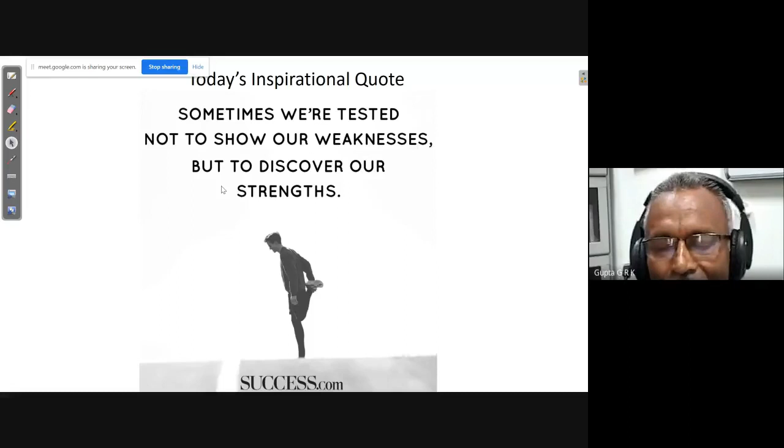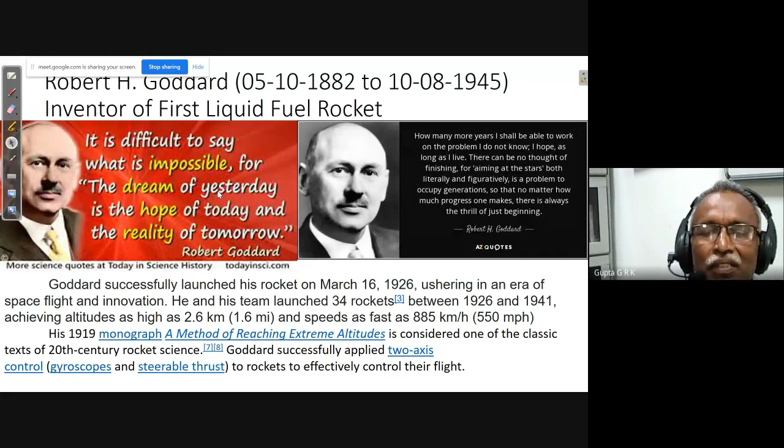There are great people born today, date 5th October. In 1882, the inventor of the first liquid fuel rocket, Robert H. Goddard, was born on that day. He successfully launched his rocket on March 16, 1926, ushering in an era of spaceflight and innovation. He and his team launched 34 rockets between 1926 and 1941, achieving altitudes as high as 2.6 kilometers and speeds as fast as 885 kilometers per hour. Such is the achievement of this fellow. His 1919 monograph, A Method of Reaching Extreme Altitudes, is considered one of the classic texts of 20th century rocket science.

Some more Nobel laureates are there. One Nobel laureate in economics, Reinhard Selten, got it sharing with Nash, John Nash. If you know, anybody heard about this name, John Nash?

Who is that? There is a biopic of him. Anybody knows that? Yeah, very good. There is a biopic, A Beautiful Mind. Yeah, nice. Akshay, good.

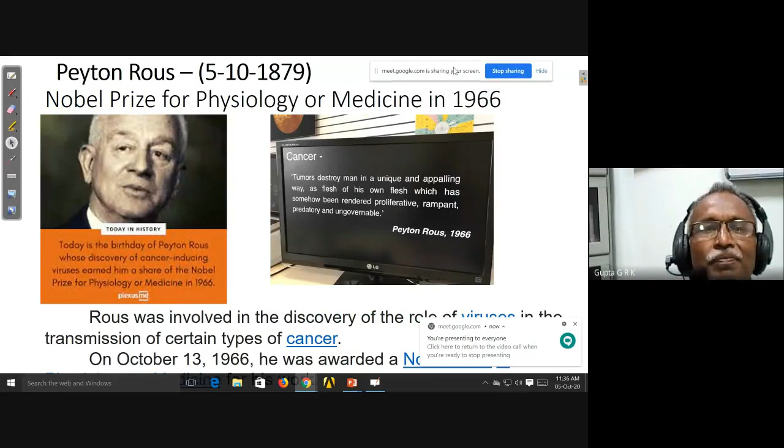So with John Nash, this fellow has taken the Nobel Prize, and he is also well known for his work on bounded rationality. We don't know much about this economics and other things. There is another Nobel laureate in physiology or medicine, and he is Peyton Rous. He was involved in discovery of the role of viruses in transmission of certain types of cancer, and he was awarded a Nobel Prize.

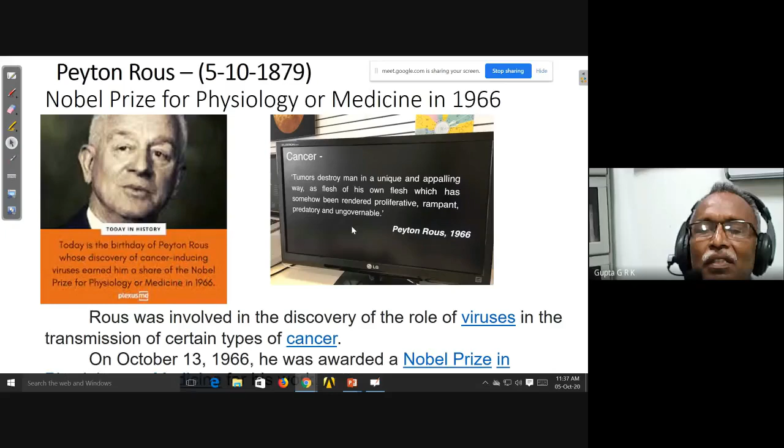So we'll start the 20th class. In the last class, we have discussed about reciprocating compressor without clearance volume and with clearance volume. We defined volumetric efficiency and also what are the factors that affect the volumetric efficiency, like clearance ratio and delivery pressure. And we have seen what is the need for multi-staging.

Then we have discussed about broad classification of thermal machines. I will reiterate what I have done because I have done it over so many pages, but I tried to put everything in a single page. Maybe the letters may be small, but everything is contained in it.

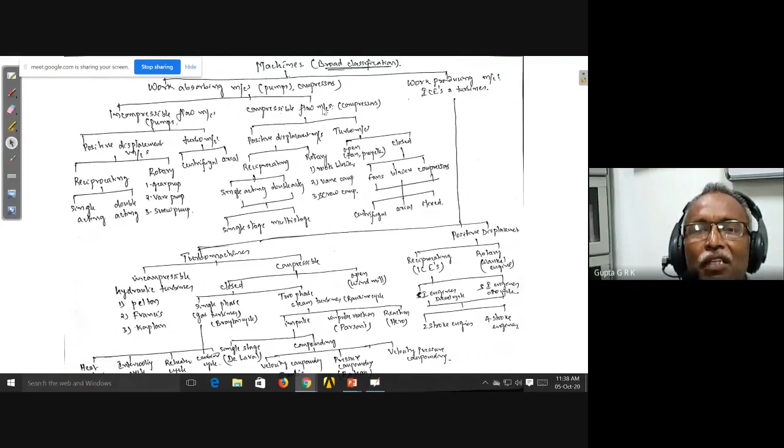This is the broad classification of machines. We have work absorbing machines, which involve pumps and compressors, and work producing machines, which involve IC engines and turbines. In work absorbing machines, we have incompressible flow machines and compressible flow machines, which involve pumps and compressors respectively. In both the incompressible flow machine and compressible flow machine, it is classified into positive displacement machines and turbo machines.

In positive displacement, we have reciprocating pumps and rotary pumps. I told you these are different from turbo machines, though these are also rotary. Rotary pumps include gear pump, vane pump, screw pump like this. Reciprocating pumps have single acting and double acting pumps, based on how many sides we are having the delivery. Before going further, we will see each difference.

Incompressible flow machine and compressible flow machine, it is based on the type of flow, but not the type of fluid. Here's an important thing: anybody know what are the incompressible fluids? Any incompressible fluid?

Actually, there is no incompressible fluid. It is an ideal fluid. Inviscid fluid and incompressible fluid are ideal fluids. But the flow can be incompressible based on the variation of density.

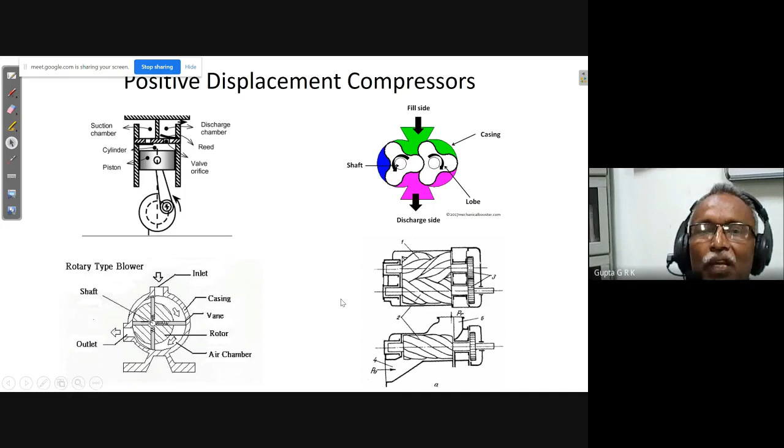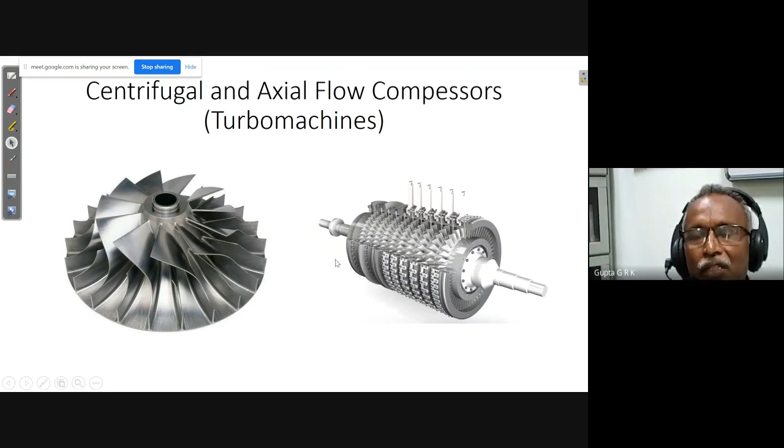Similarly, in the screw pump, air enters here, the compressor pushes it, and it comes out due to back pressure as it slides over the screw. These are positive displacement machines, and then there are turbo machines like centrifugal compressor and axial compressor, which you will study in turbo machines. We will also discuss the differences between these two types of compressors.

Initially we will see a two-stage reciprocating compressor, which you would see in cycle shops, as I mentioned. There are two cylinders, one low pressure cylinder and another high pressure cylinder. If someone asks which is the HPC and which is the LPC, remember the smaller one is the HPC and the bigger one is the LPC, because at low pressure the volume occupies more space, so it needs a larger cylinder. After compression in the first stage, the volume gets reduced, so my second cylinder will be very small.

So that's why if you have more number of stages, the latter stages will be very small and the overall weight will be less. If you have a single cylinder, it will be huge, and its thickness and materials cost more, so it's costly. That's the difference between single stage and multi-stage.

Now see the difference between rotary compressors and reciprocating air compressors, that is turbo machines versus reciprocating air compressors. The pressure ratios are very high in reciprocating compressors. In turbo machines, the pressure ratios are very low, up to 10 bar it can deliver, whereas here up to 1000 bar it can deliver.

And always, as I told, the discharge and the pressure are inversely related. High pressures mean low flows, low pressures mean high flows. So in turbo machines, the flows are very large, 3000 meter cube per minute, but pressures are low, 10 bar. Here, up to 300 meter cube per minute only, but up to 1000 bar.

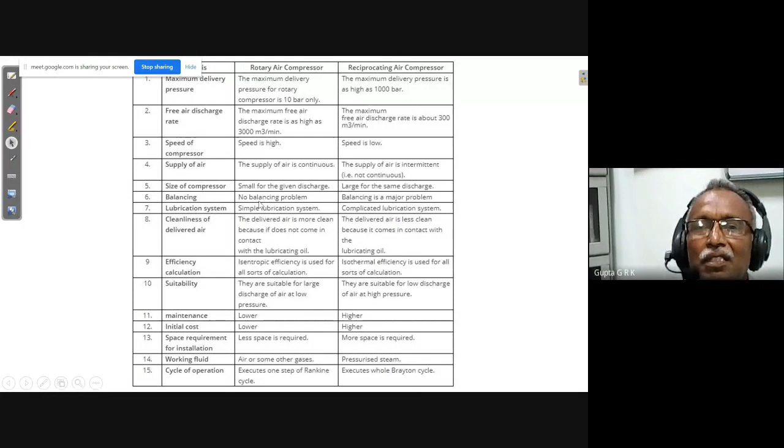Rotary compressor means it is positive displacement only, which includes gear pump, vane pump, and screw pump, which I have shown. In the same way, for compressible flow machines, I have positive displacement and turbo machine types. In positive displacement, I have reciprocating and rotary type. Here, instead of gear pump, there is another name called roots blower. Similarly, vane pump becomes vane compressor, and screw pump becomes screw compressor, because compressible effects are more.

And in the reciprocating, we have single acting and double acting, and in both of them I can have single stage and multi-stage. When you come to turbo machines, I can have open machine or closed machine. Open machine, I already told, is a fan or propeller. Closed system includes fans, blowers, and compressors.

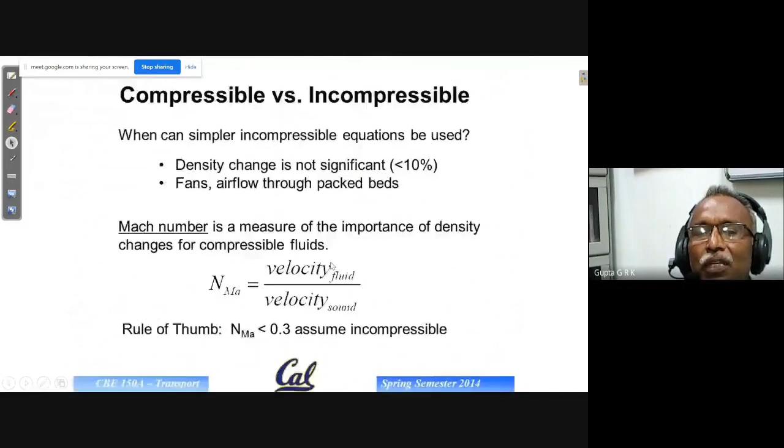Coming to the work producing machines, I have turbo machines and positive displacement machines. In positive displacement machines, I have again reciprocating and rotary. Reciprocating IC engines, you know it, SI engine and CI engine. SI engine means petrol engine working on the Otto cycle. CI engine means diesel engine working on the diesel cycle. Both of them can have 2-stroke engines and 4-stroke engines. We can see this difference as well.

Here we will see the difference between centrifugal and axial flow compressor. Centrifugal compressor cannot have multi-staging, but axial flow can. In centrifugal, flow enters and leaves in a certain way, and if you want another stage, it has to turn and enter again, making multi-staging very difficult and complex. Normally only a single stage is used.

So for small machines, we use centrifugal compressors. For large machines and large pressure ratios, we use axial compressors. For a single stage, the pressure ratio in centrifugal is more and in axial is less, but when many stages are used, the overall pressure ratio becomes quite large.

As I told, if the pressure ratio required is more than 7, you have to go for a multi-stage axial compressor. Single stage gives low pressure, but multi-stage gives high pressures, so you have to use axial compressors. Efficiency is low in centrifugal, and efficiency is high in axial.

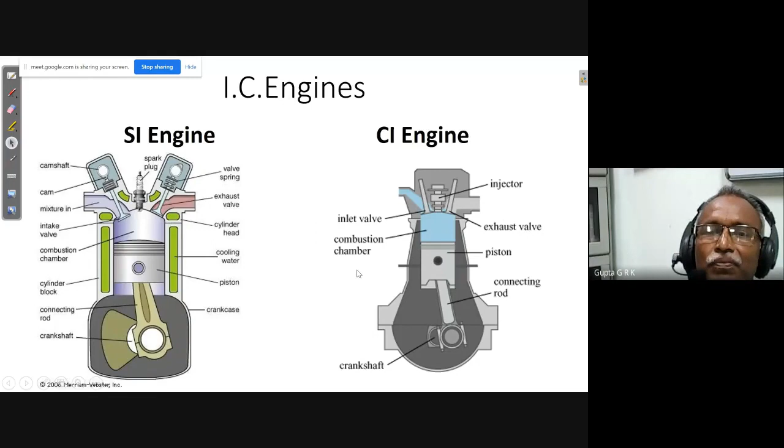So we will see spark ignition and compression ignition. SI engines draw a fuel-air mixture into the cylinder, while CI engines draw only air into the cylinder. Petrol engines operate with low pressure and temperature, while diesel engines operate at high pressure and temperature.

You can see the ranges: pressure 6 to 12 for petrol, 35 to 40 for diesel, and temperatures 250 to 300 versus 600 to 700 degrees centigrade. Because of this, comparing the Otto cycle and diesel cycle, if the pressures are the same, then the Otto cycle is more efficient. But here pressures are very high, that's why diesel engines are more efficient.

But because of these high pressure ratios, diesel engines are heavy engines, and petrol engines are light engines. So petrol engines are used in light vehicles, like all two-wheelers have petrol engines, and cars also used to have petrol engines only. Now, in recent years, they are using diesel engines too. Heavy vehicles like trucks, tractors, and heavy machinery use only diesel engines.

So petrol engines have carburetor and spark plug, while diesel engines have fuel injection pump and injectors. Petrol engines use constant volume combustion, the Otto cycle, while diesel engines use constant pressure combustion, the diesel cycle. Ignition takes place by spark in one, and by high compressed air in the other.

Petrol engines are quantity governing... diesel engines are quality governing, meaning the speed of petrol engines is controlled by varying the quantity of the air-fuel mixture.

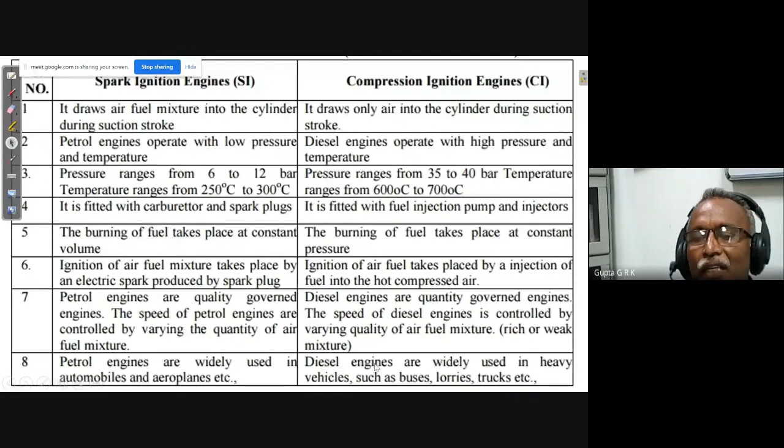Petrol engines are very widely used in automobiles and aeroplanes, and diesel engines are for heavy vehicles like buses, lorries, and trucks. This is the SI engine and CI engine difference.

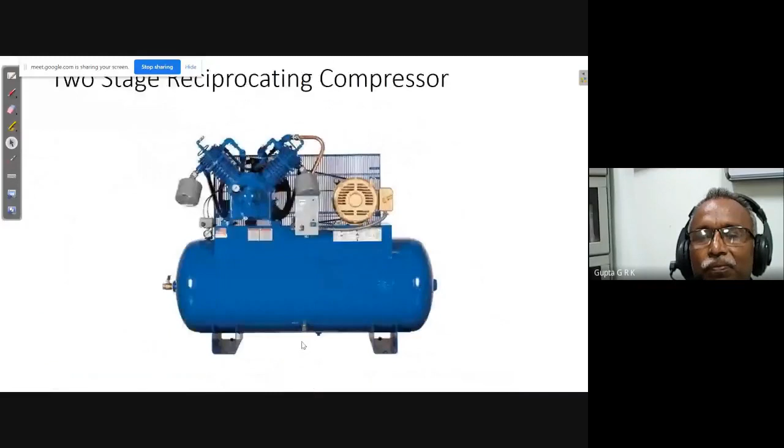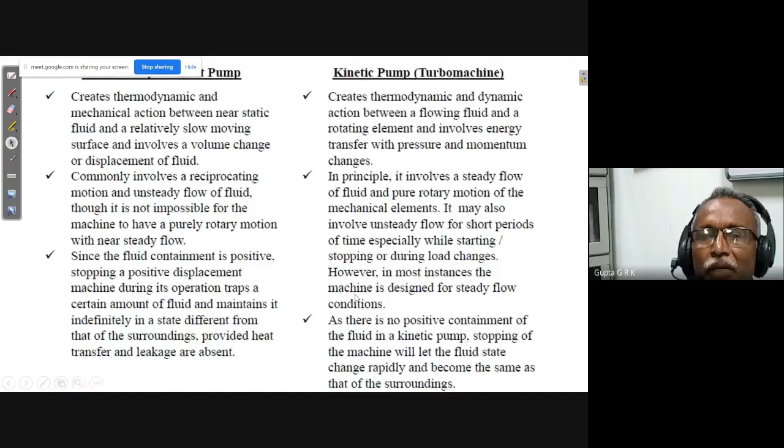Within CI and SI engines, again we have two-stroke engines and four-stroke engines. This you have studied, and again we'll do a comparison because these are very important for your written tests, interviews, or any entrance examinations you write. Such things are very important.

In a four-stroke engine, there will be suction, compression, a power or expansion stroke, and an exhaust stroke - 4 strokes happen in a cycle. Each upward and downward movement is 1 revolution of the crank. So 1 revolution gives 2 strokes - it takes 2 revolutions to get 1 power stroke.

Only in one stroke does it take the power. So I should have a flywheel which stores energy by inertia and supplies it in the other strokes - only the remaining power we get. So a 4-stroke engine will have a large flywheel.

In a 4-stroke engine there will be valves, which makes the construction complex. In a 2-stroke engine, there will just be ports. Suction and exhaust take place at the same time.

When the piston is going down, air-fuel mixture gets trapped in the crankcase. It gets pressed and pushed in. When it comes down, some of the air-fuel mixture goes out also, and the exhaust is open too - both are open. When it goes up, this gets closed and some mixture is trapped, which is compressed.

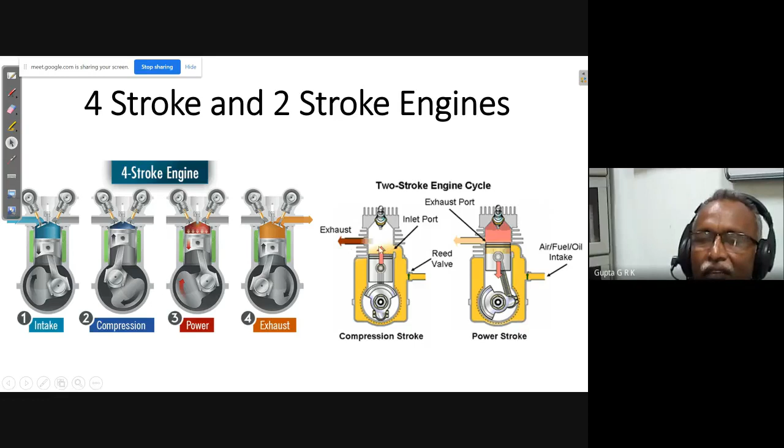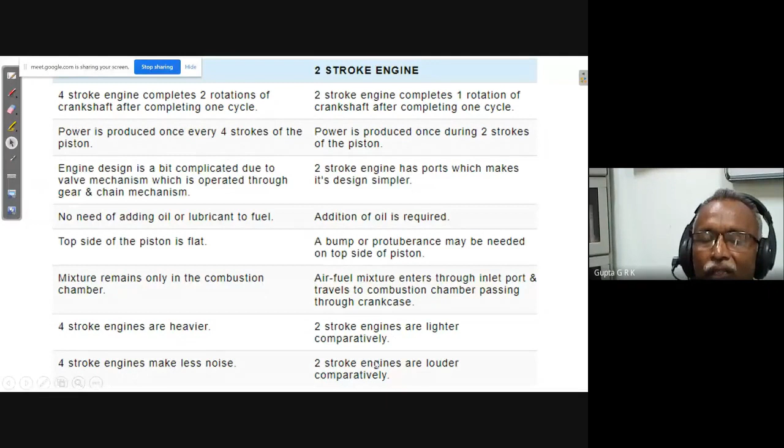So 4-stroke engines are heavy and 2-stroke engines are lighter, and 4-stroke engines give less noise while 2-stroke engines give more noise. This is about 4-stroke and 2-stroke engines.

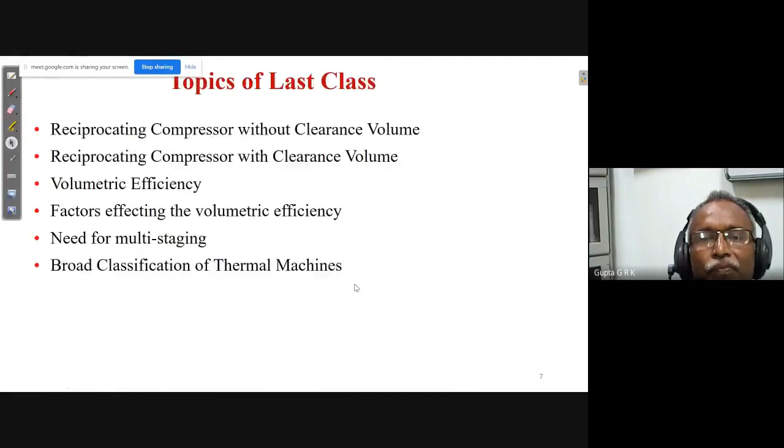Now coming to the turbo machine side, I have incompressible, which are hydraulic turbines, which you are going to study, as I told, in fluid mechanics: Pelton turbines, Francis turbines, and Kaplan turbines.

And coming to compressible, I have closed machines and open machines. Open machines include the windmill, and closed machines can be single phase machines and 2-phase machines. Single phase machines are gas turbines and 2-phase machines are steam turbines.

And in steam turbines, which you have studied in your BME, we have impulse turbine, impulse reaction, and reaction turbine. Reaction turbines are called Hero turbines. Impulse reaction turbines are called Parsons reaction turbine.

And impulse, I can have single stage and compounding. Compounding means multi-stage, and single stage turbines are called de-Laval turbines. In compounding, we have velocity compounding, pressure compounding, and velocity pressure compounding. Velocity compounding are called Curtis turbines. Pressure compounding turbines are called Rateau turbines.

And on the gas turbine side, now I think you are studying about various Brayton cycle. Here Brayton cycle is used, and for steam turbines, Rankine cycle is used. For petrol engines, Otto cycle. For diesel engines, diesel cycle.

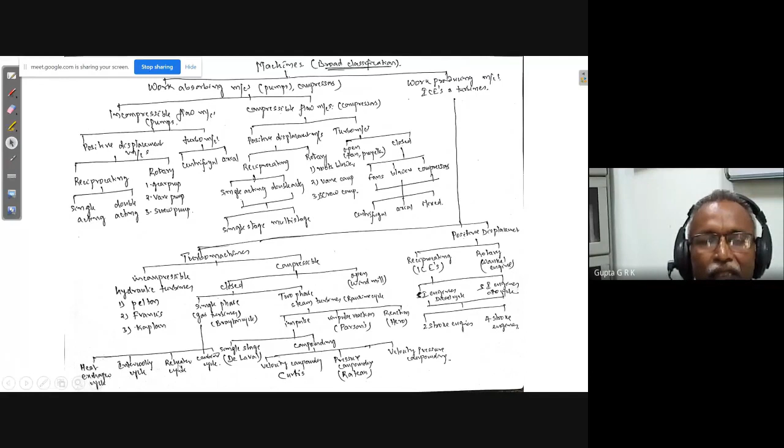In the Brayton cycle, we will have various improvements like having intercooler, reheater, heat exchanger, or combined cycle. So these are various variations of gas turbine cycle which you are going to study in turbo machines.

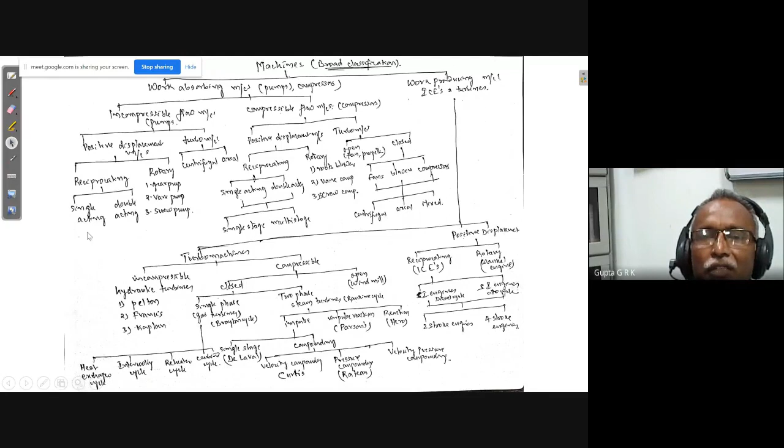Okay, this is the broad classification of machines. Here some more figures also we can see. So this we have seen, this we have seen, this we have seen.

IC engine for a big one, V12. V12 means here there are some cylinders, 6 cylinders on this side, 6 cylinders on this side, arranged like a V. There are total 12 cylinders. So for heavy machineries, these types are used.

And gas turbine engine, which is normally used in aircrafts and all, is like this. We'll have suction, here these are compressor stages, all these are compressor stages. Here there will be combustion chamber, and here there are turbines, and here this is a nozzle in which expansion takes place, and this is a jet engine. You will get the aircraft moving this way.

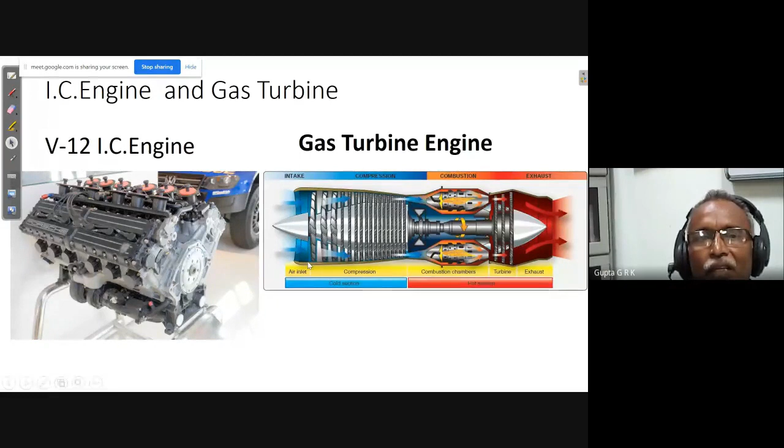And if you see the difference between IC engine and gas turbine, again, this is like positive displacement, and this is turbo machine. All those differences come here also. It is heavy, the weight per HP developed is greater. It is lighter, right? And ignition and lubrication systems are complicated. Here it is simple because I don't need any lubrication because it is rotating one.

Okay, this you will study in gas turbines. Why it is low means compressor takes almost 60% of the work developed by the turbine. And also exhaust temperatures are very high, the gases leaving will be at high temperatures. That's why the efficiencies of Brayton cycle are less.

And people have tried to increase the efficiency by using the exhaust gases for some better purpose, or sometimes you can generate steam and have a steam turbine run by that. So this is called combined cycle. Gas turbine exhaust runs the steam turbine, giving what is called combined cycle, and efficiencies are very high. But a single gas turbine alone will have less efficiency.

And here fuel cost is high; I can use cheaper fuels here in the gas turbines. And here work developed per kg of air is less, here work developed is higher, and these are high speed machines. Turbo machines are high speed.

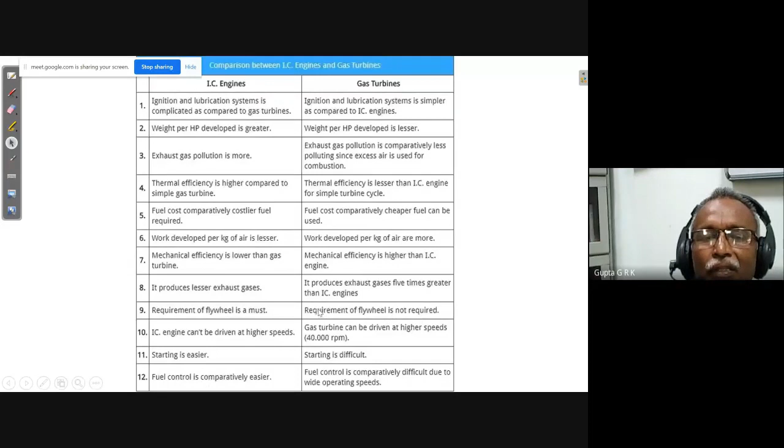And you can have turbo machines itself: I have gas turbine and steam turbine. So gas turbine and steam turbines are mainly used in power plants. And gas turbines also, now they are used - all thermal power plants use gas turbine and also steam turbine, as I told, using this exhaust if I can run the steam turbine. But all old power plants, they are only steam turbine power plants.

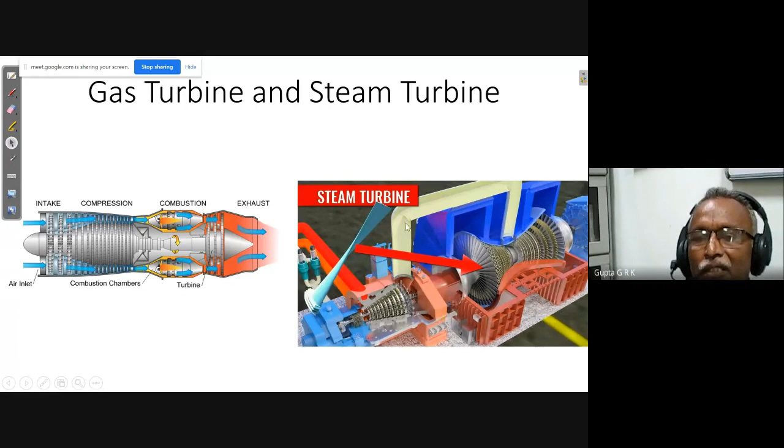And if you compare these two, here gases are the working fluid, here steam is the working fluid. Here main components are compressor and combustor, and here boiler and accessories. And running cost is less and it starts quickly.

Running cost is high because very huge boilers and other things will be there. Its efficiency is more because Rankine cycle efficiency is more. As I told, if you see the compressor in the gas turbine, here pump in the steam turbine. Pump requires very less work because it is incompressible liquid. Gas turbine compressor occupies large volume, so it takes more work. That's why gas turbine efficiency is less.

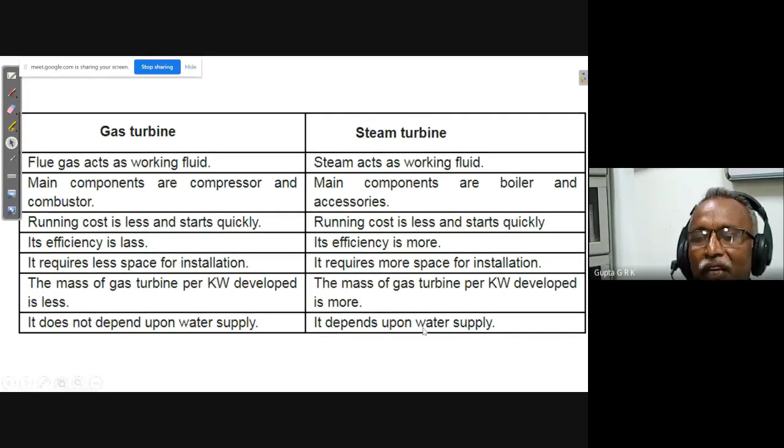Mass of gas turbine is less, steam turbine is heavy because I will have large boiler, large condenser and all those things. Here it depends on water supply. Here it doesn't depend on water supply because it needs large amount of water for condenser and also for generating the steam.

Then we have impulse and reaction turbines. This you will study in turbo machines in detail. The main difference is the shape of the blade. Here the shape of the blade is symmetric or bucket type, here it is aerofoil type. That's why one is costly and the other is cheaper. Because of the symmetric blade type, there is no change of pressure or velocity across the turbine, only the conversion takes place in the nozzle. Nozzle comes and hits the blades.

That's why it is called impulse. In impulse turbine, all the change of pressure energy to kinetic energy takes place only in the nozzle, and there is no change of pressure or velocity in the rotor. Here both stator and rotor will be there, and expansion takes place in both. In impulse, all the pressure is converted to kinetic energy in the nozzle, kinetic energy increases, pressure decreases, and it remains constant across the rotor. But in reaction turbine, there will be pressure decrease in the stator and also pressure decrease in the rotor.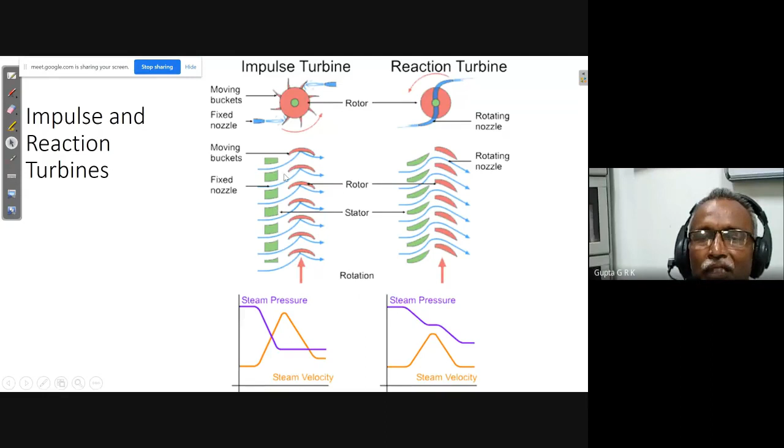That is the difference between impulse and reaction. Reaction turbines are costly but more efficient, impulse turbines are cheaper but less efficient. The blades in impulse are symmetrical, in reaction they are asymmetrical. Pressures on both ends are same for impulse, but different for reaction because expansion takes place both in rotor and stator. The blade efficiency curve is less flat for impulse and more flat for reaction. If you draw the efficiency curve, it will be hill-like with a peak for impulse turbine, and flat over the top for reaction. So the range of operation is wider for reaction turbine.

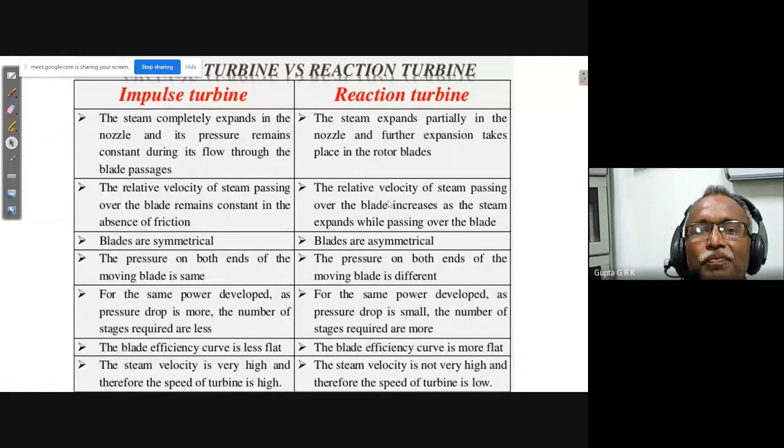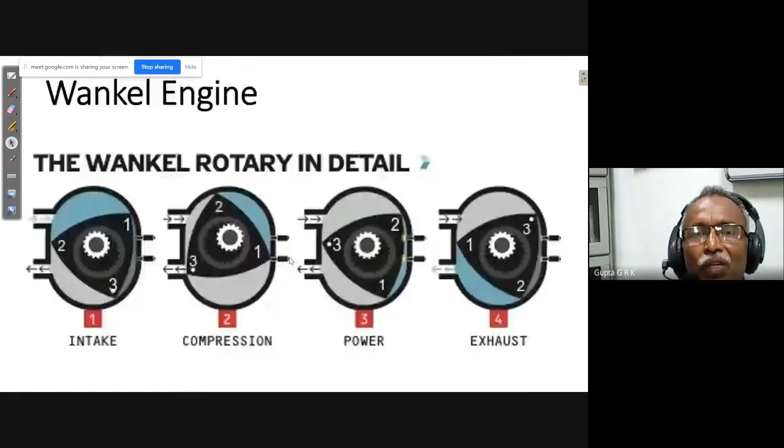Okay, this is about all the classification. So any questions, because so many things I have talked about, you have to be familiar. Go through all the slides, go through the differences. If you want any thermal engineering book, there are so many books, one by Ballaney, one Mathur and Mehta, and Ratan, and so many other authors. Any thermal engineering book, if you take, you can get all these tables.

Back pressure means delivery pressure, there is nothing else different, it's the suction side versus the delivery side. Suppose a receiver reservoir is there, as I told in reciprocating compressor, it is pushing into the reservoir. Reservoir pressure is very high, that is back pressure, it is pushing the fluid into the high pressure reservoir. So the increase in pressure is due to pushing into the high pressure side. High delivery pressure is the back pressure. Is it okay?

So you go through all the tables, all the differences, right? Any doubt you can ask me anytime.

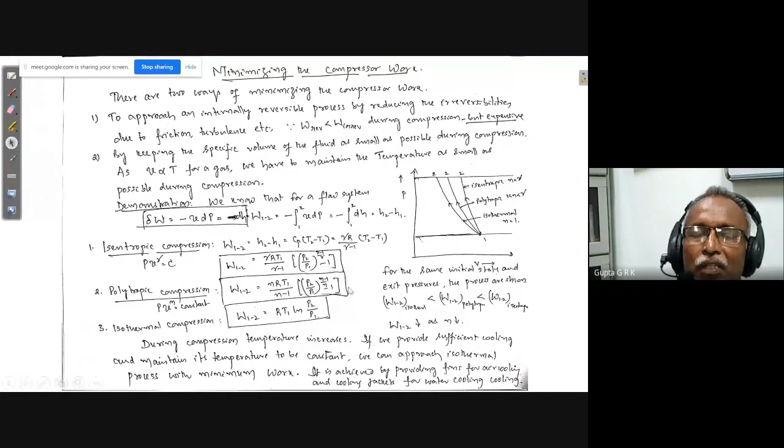Okay, that is about this. Again, we'll switch back to our compressor. So we have seen compressor, and I told you isothermal work, isentropic work, polytropic work. We have seen the expressions, and isothermal work is small, and we define what is called as isothermal efficiency. Isothermal efficiency is isothermal work by actual work, that is isothermal efficiency.

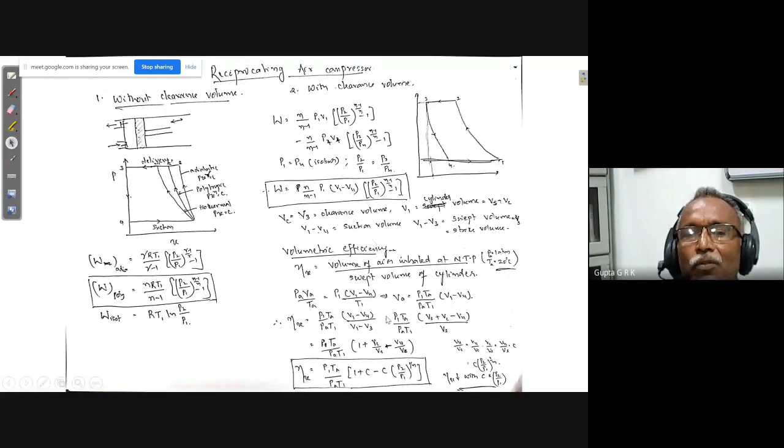And this is what we have seen, the expression without clearance volume. With clearance volume, this V1 is replaced by V1 minus V4, the actual suction volume, because the suction volume gets reduced with the clearance. We have defined what is called as volumetric efficiency, which is a function of clearance ratio and the pressure ratio, and we have seen how it changes as the pressure ratio increases.

So this expansion comes like this. The suction volume gradually reduces as the pressure increases. Similarly, if the clearance is increasing, the lines initially with small clearance come like this. As the clearance volume increases, the suction volume gets reduced here.

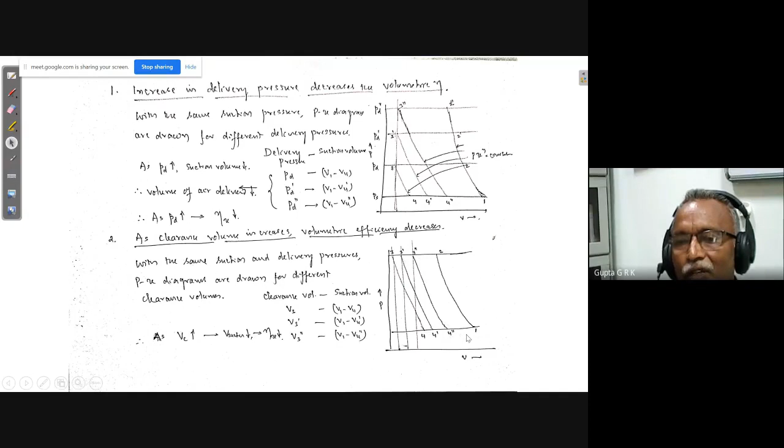And that's why we go for what is called as multi-staging. With multi-staging, I can use the advantage of intercooling. Between the stages, if I can reduce the temperature of the fluid, I can reduce the volume of it and reduce the work required for compression. That is the advantage of using this.

So it reduces this much of work and also increases the volumetric efficiency. If it is a single stage, this is the volume of air sucked or delivered, and from here to here this much is the volume that is taken in. So I will have more amount of air supplied, that's a high volumetric efficiency.

So volumetric efficiency is high, work is reduced, and the overall weight also, I told, because low pressure compressor will be a bit large and the high pressure one will be very small. So the overall weight can be reduced.

And lubrication maintenance is easy because the temperature everywhere is being cooled, so the lubrication oil stands like a film. And also it gives uniform torque because all are producing power, all are rotated.

In each revolution, there will be more number of cylinders sucking and delivering, so it will be more balanced, and there will be uniform torque.

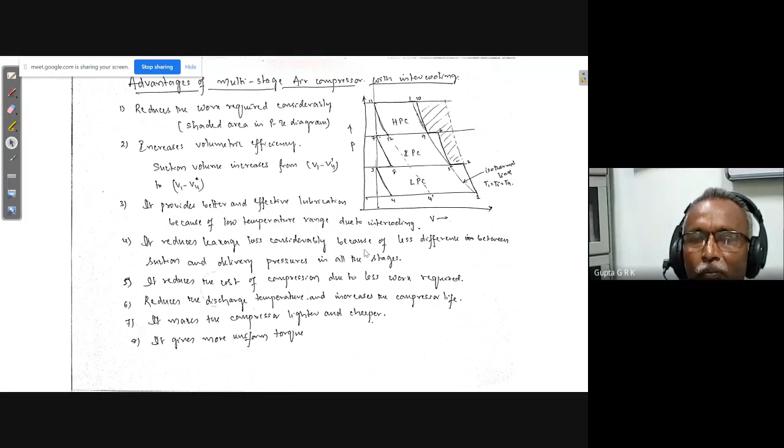So if I have a multi-stage compression with intercooling, here we have taken two stages. Here in the first stage, it is sucked here and it is compressed and it is delivered. I think I didn't show it.

So with clearance, it comes like this. If this is the clearance volume, this goes like this, and this goes, this is the way it goes. Okay, the first.

First stage it goes like this and goes like this in this way, and the second stage it comes like this. Here, because of the intercooling, it is cooled to this, so the whole one goes like this, comes like this, and then it goes like this.

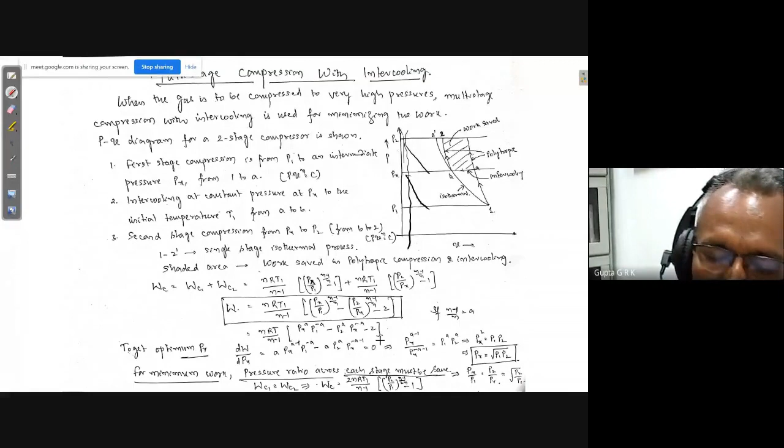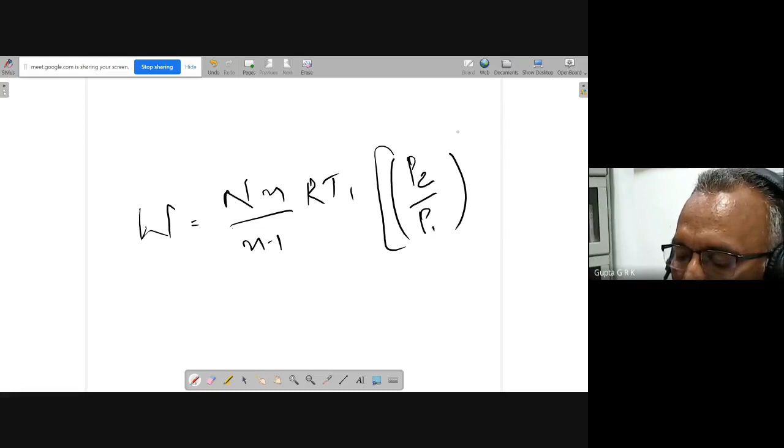And if I write it in a general way for N stages, it becomes capital N times n by n minus 1, R T1, into the power of P2 by P1 to the power of n minus 1 by n into capital N, minus 1. This is how it comes, where capital N is the number of stages. If it is 2 stages, it is the square root of P2 by P1, and if it is 3 stages, it will be the cube root, and so on.

In this way, if I write only the stage pressure ratio, that is Px by P1, then it will be only n minus 1 by n. But if I want to write the overall pressure ratio, then this capital N will come into the expression.

Okay, so that is the way it works. So we will see a small problem.

Quickly: a 2-stage single-acting air compressor takes in air at 1 bar and 27 degrees centigrade at the rate of 5 kg per minute.

Another thing to remember whenever you solve a problem: if mass flow is not given, you can find change in enthalpy or change in entropy per unit mass flow. But if mass flow is given, and you are asked to find change in entropy or similar quantities, you have to multiply by mass flow. Don't forget that, otherwise your answers will not match. The total change is different from the specific change.

Here mass flow is given as 5 kg per minute. The air is compressed to a final pressure of 16 bar. So I am given T1 = 300 degree Kelvin, mass flow, pressure 1 bar, and the delivery pressure. All these are sufficient. The index of compression and expansion for both stages is 1.3.

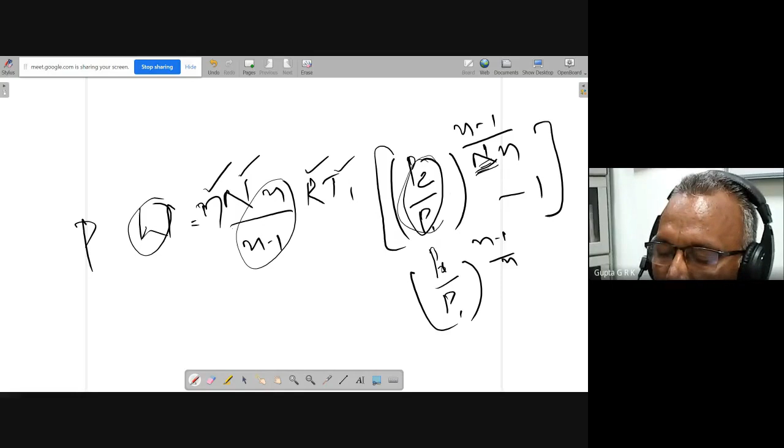So mass flow is given, number of stages is 2, n is given, n by n minus 1, r is known, T1 is given, and pressure ratio P2 and P1 both are given. Everything is given, and you just have to substitute to find out the work done, the work required.

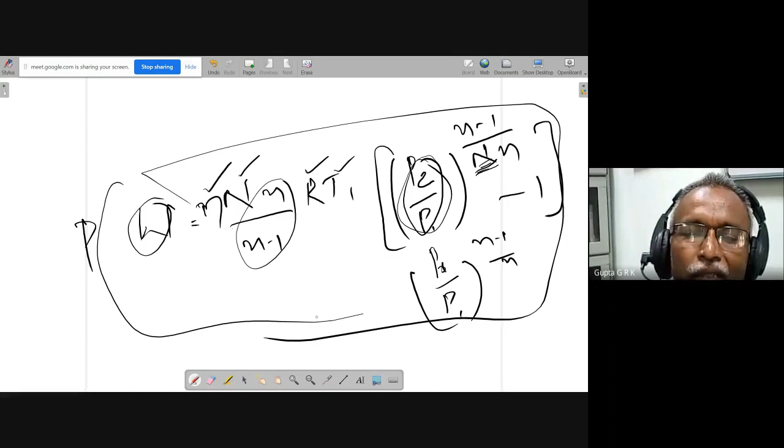And calculate the power required and isothermal efficiency. So for isothermal efficiency, you have to find out isothermal power. You know it: P1 V1 log V2 by V1, or RT1 log V, MRT1 log V2 by V1, or log P2 by P1. So you know P1, P2, and T1 is known. Everything is known, so you can find out.

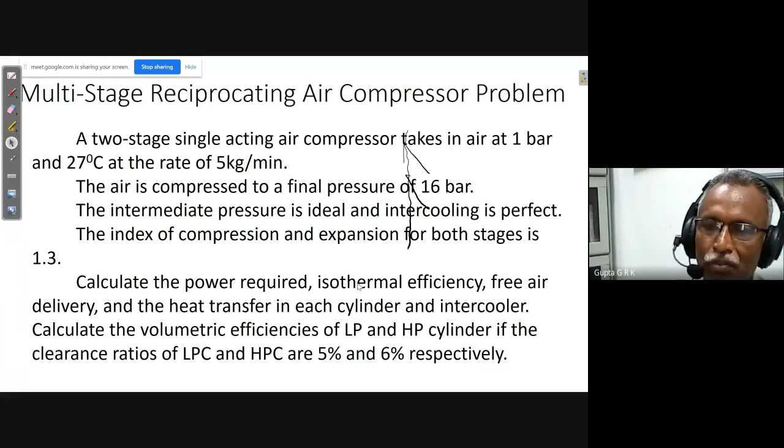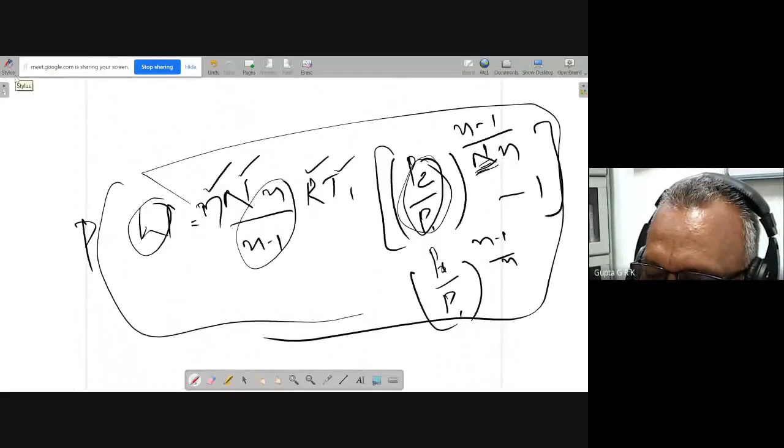And free air delivery, we will see those things too. So this is the way. So P2 by P1, if I take this, I think I have to clear this.

Isothermal work is MRT1 into log P2 by P1, meaning the overall pressure ratio. I am giving the overall pressure ratio. So MRT1 log P2 by P1 gives 19.9 kilowatts. So isothermal efficiency is isothermal work by actual work, it is 84.9%.

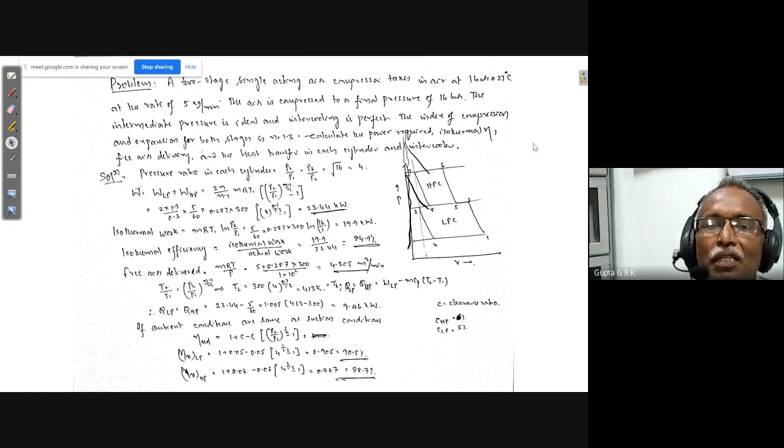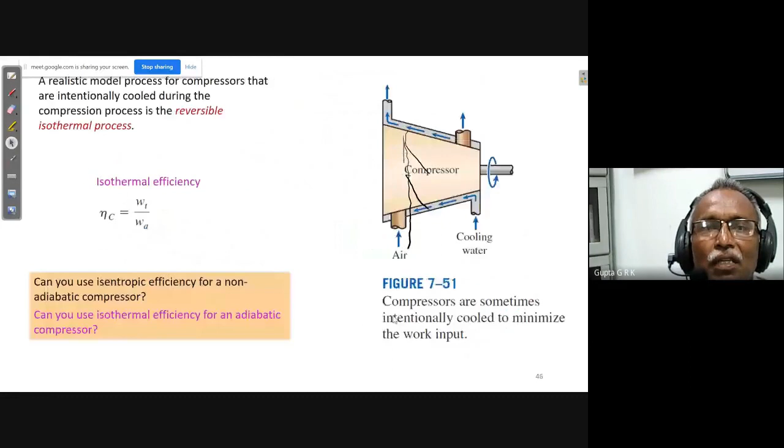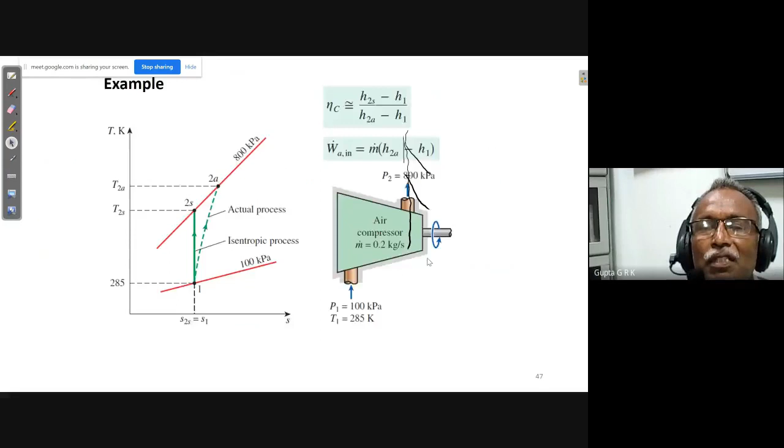And then in the next class, we will see, because already we have discussed about isentropic efficiency of nozzle and turbo machines, right? So we will go further down and see how to solve a Rankine cycle. So when I have a pump, then I have a turbine, and even Brayton cycle, all those problems we will see in the next class, how to solve different problems.

Okay, this is about this. Any questions or doubts? I don't know, actually today class strength is only half. It is because of an assignment.

Small n and capital N. Small n is the index of polytropic compression or expansion, the polytropic index, and capital N is the number of stages. Is it okay?

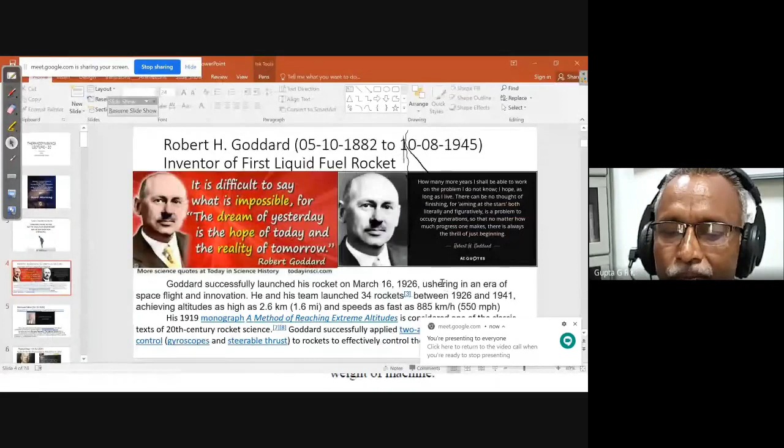Okay, we will go for the story then. It's a nice story. A lady in a faded dress and her husband dressed in a homespun suit. Just let me erase this.

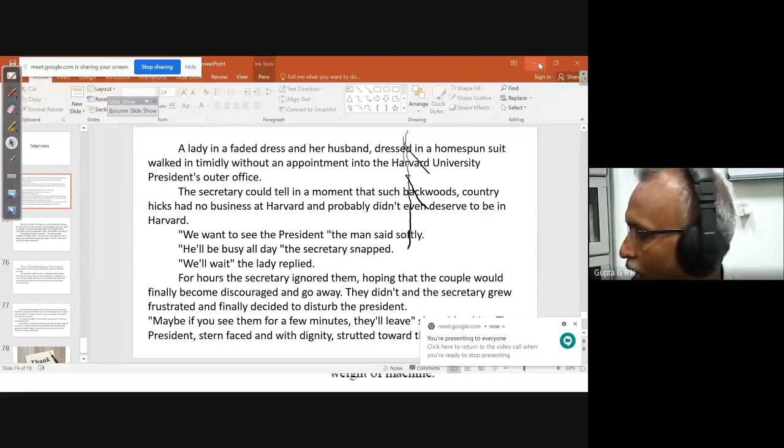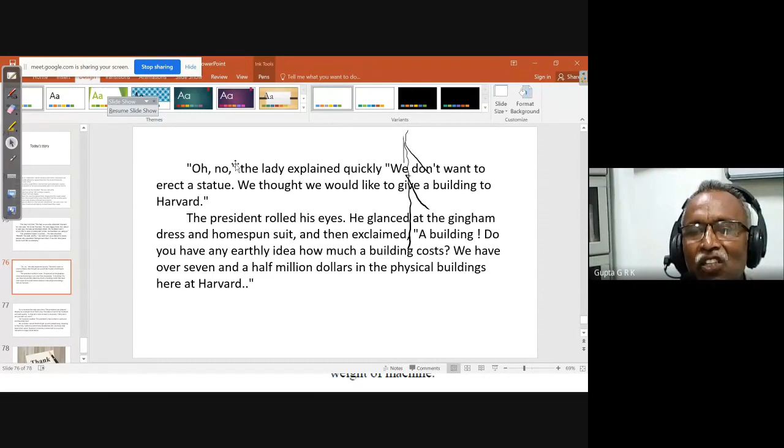A lady in a faded dress and her husband dressed in a homespun suit walked in timidly without an appointment into the Harvard University president's outer office. The secretary could tell in a moment that such backwoods country hicks had no business at Harvard and probably didn't even deserve to be there. They said, 'We want to see the president.' The man said softly, and 'He will be busy all day,' the secretary snapped. 'We will wait,' the lady replied. For hours, the secretary just ignored them because they looked like poor people, village side people. The secretary didn't bother, hoping the couple would finally become discouraged and go away. They didn't, and the secretary grew frustrated because such people, if they are in the office, it looks bad. So he finally decided to disturb the president. 'Maybe if you see them for a few minutes, they will leave,' she said to him. The president, stern-faced and with dignity, strutted toward the couple. The lady told him, 'We had a son who attended Harvard for one year. He loved Harvard. He was happy here. But about a year ago, he was accidentally killed. My husband and I would like to erect a memorial to him somewhere on the campus.' The president wasn't touched, he was shocked. 'Madam,' he said gruffly, 'we can't put up a statue for every person who attended Harvard and died. If we did, this place would look like a cemetery.' 'Oh no,' the lady explained quickly, 'we don't want to erect a statue. We thought we would like to give a building to Harvard.' The president rolled his eyes. He glanced at the gingham dress and homespun suit and then exclaimed, 'A building? Do you have any earthly idea how much a building costs? We have over $7.5 million in the physical buildings here at Harvard.' For a moment the lady was silent. The president was pleased, maybe he could get rid of them now. The lady turned to her husband and said quietly, 'Is that all it costs to start a university? Why don't we just start our own?' The husband nodded. The president's face wilted in confusion and bewilderment. Mr. and Mrs. Leland Stanford got up and walked away, traveling to Palo Alto, California, where they established the university that bears their name, Stanford University, a memorial to a son that Harvard no longer cared about.

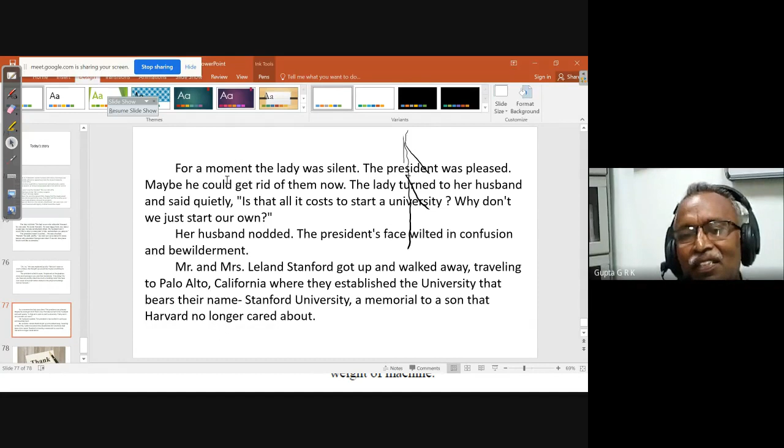Okay, this is the thing. So by outside appearances, we cannot estimate about other people, right? Okay, thank you very much.

If there is anything else, you can ask. Otherwise, when reciprocating machines are manufactured, if it has too many problems while using it, is there any advantage of using reciprocating machines? I told you reciprocating machines are used when you want very high pressure ratios, right? Turbo machines are for low pressure ratios. And in many applications we use reciprocating compressors. Even in refrigerators we use reciprocating compressors. Our home refrigerators have reciprocating compressors.